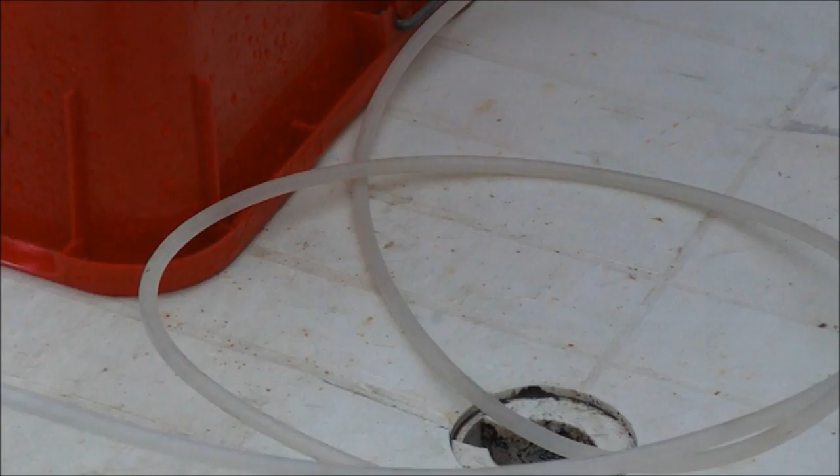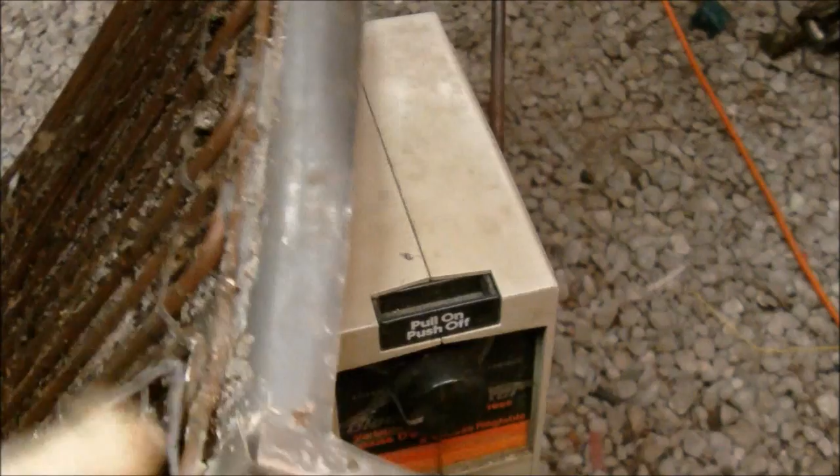Before I start putting the generator together, I just want to say a word of caution. Do not try this at home. This video is just for entertainment purposes only. So I'm using some scrap stainless steel. So the stainless steel was out of a little milk fridge, and I've just removed the stainless steel insert that was actually in there. You can see here it had some tubes on the back of it for the refrigerator part. And so what I've done is I've just cut this out of it.

It's a commercial stainless steel. So I think it's probably 316 or whatever, the good stuff. So what I do is I check the steel with a magnet, and stainless steel, the magnet should not stick to it whatsoever. So out of this piece of metal here, I can get 8 5-inch plates. And all I have to do is just measure these out now and cut them out.

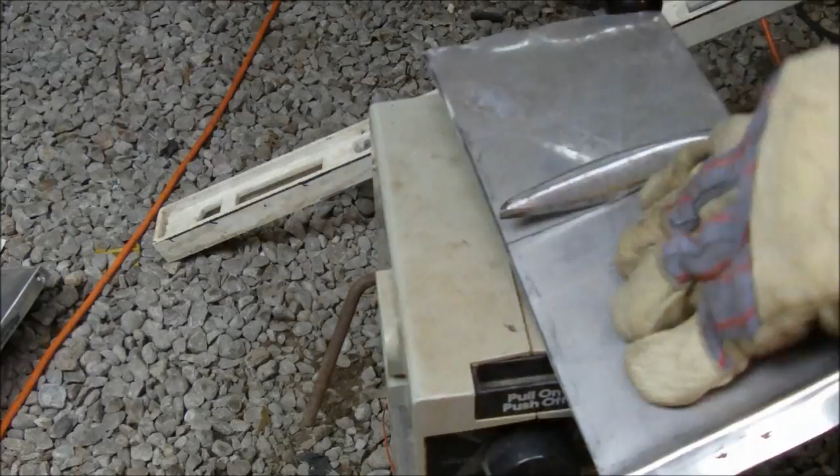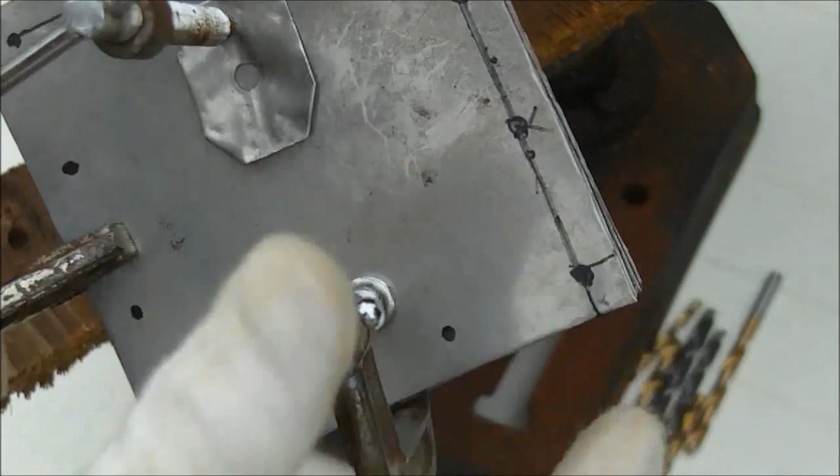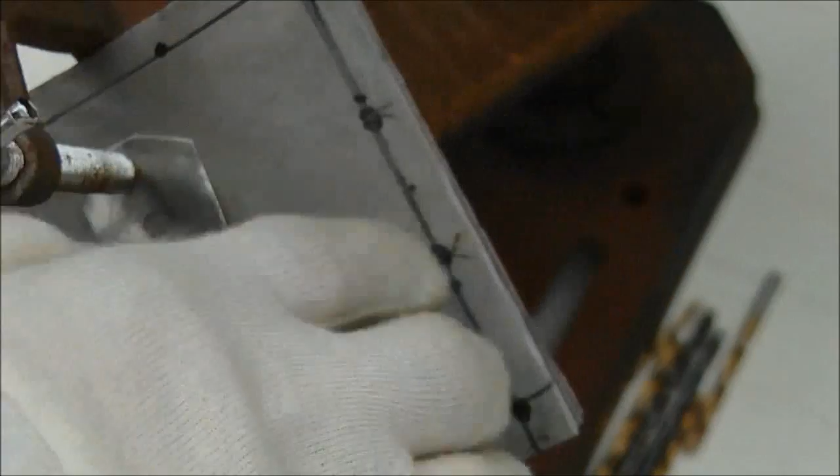So now I need to drill the holes in the plates. So what I've done is I've just sandwiched them together in these clamps here, and I've drawn out the holes, the spacing, and basically they're spaced out evenly on the plates where the gaskets are going to be. Now what I'm going to do is I'm going to start one hole, and then I'm going to drop a bolt in, and then I'm going to go around and continue. So that'll hold them together in place. So let's get started.

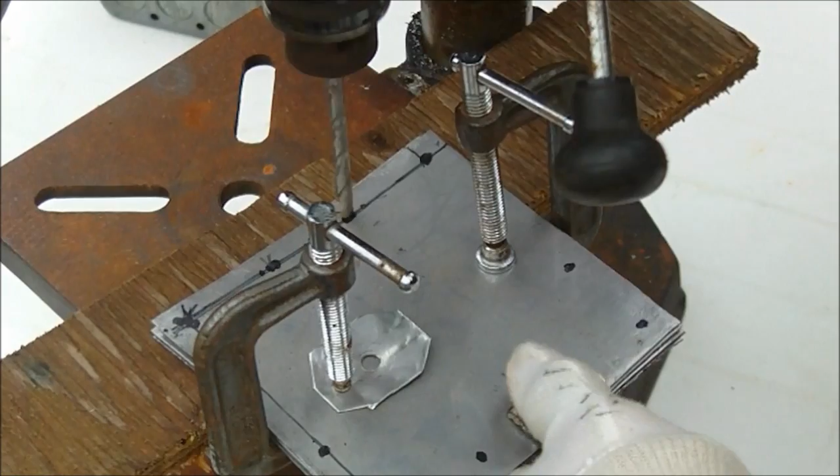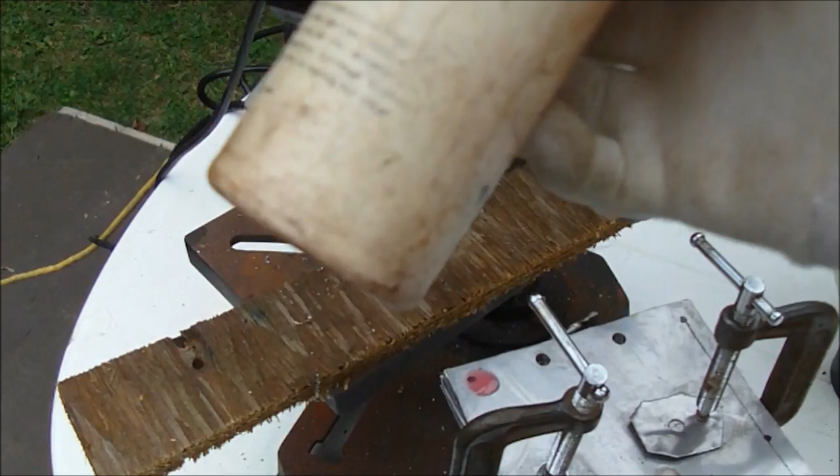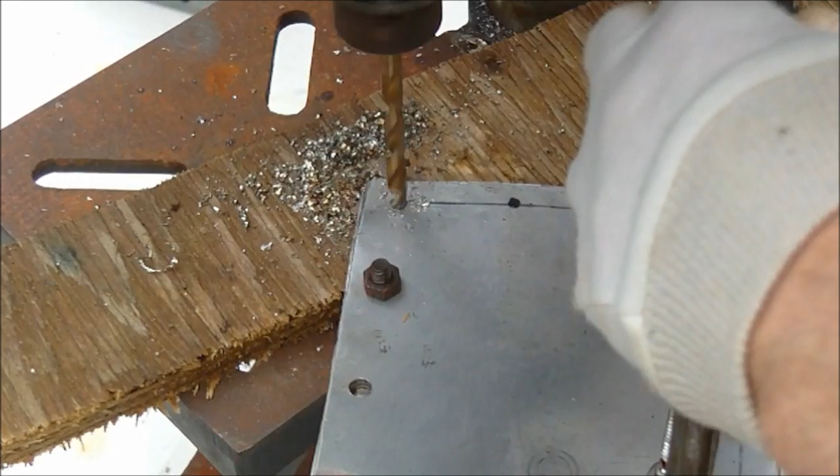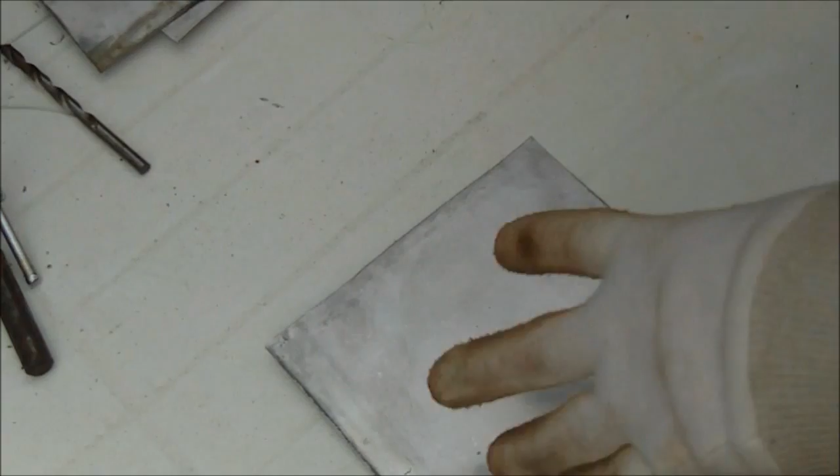So I'm going to put a little bit of oil. What I'm using is just transmission fluid and water mixed together as my drilling oil. And it seems to work okay. So this is just a backyard build, and I don't have the equipment. I have the neutral plates drilled. Now I need to drill the power plate. I have 3 power plates in this dry cell.

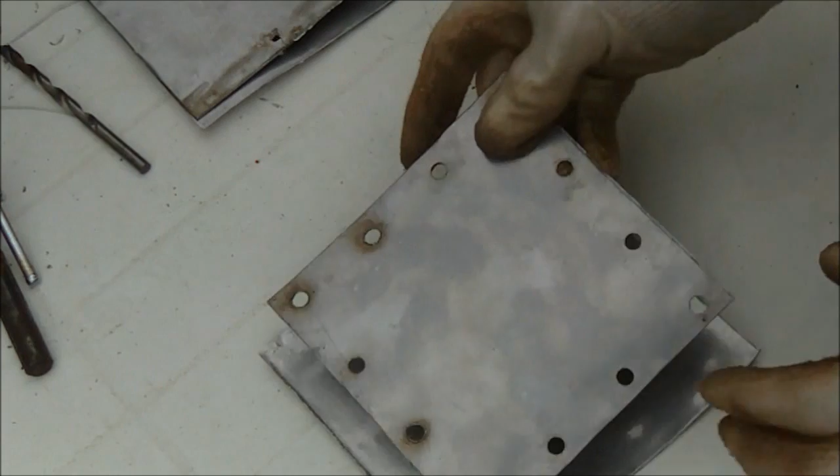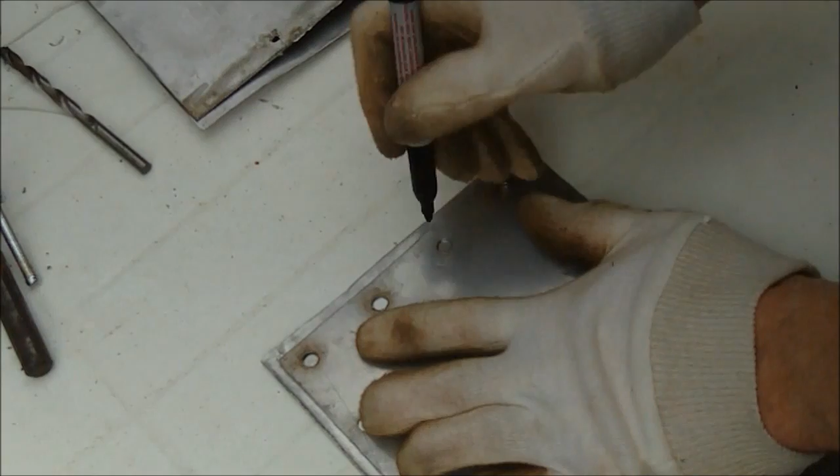And what I'm going to do is I'm just going to lay the neutral plate on top of the power plate. Now this plate here is larger, so then I can attach my terminals to it. And then I'll know which ones are the power plates as well. So now this plate is larger than the neutral plate, so you can just lay it on top. And whatever way you want to do this, you could clamp it down and then drill it, or you could just mark it with a marker. So I think I'm just going to mark the holes, and then I can just drill it out.

So drill the last power plate. Now you can see that it drills a lot easier when you're just drilling one plate at a time. So either way how you do this, you may want to just do it this way, one plate at a time, because you're going to go through a lot of drill bits. You're going to have to sharpen.

Okay, so if you drill your plates one at a time and you have this happen where the metal is actually pushed down and all jagged, then you're going to have to smooth that out before you go to put this thing together. So what you can do is you can hammer it down and then drill it out, but it won't be quite as smooth.

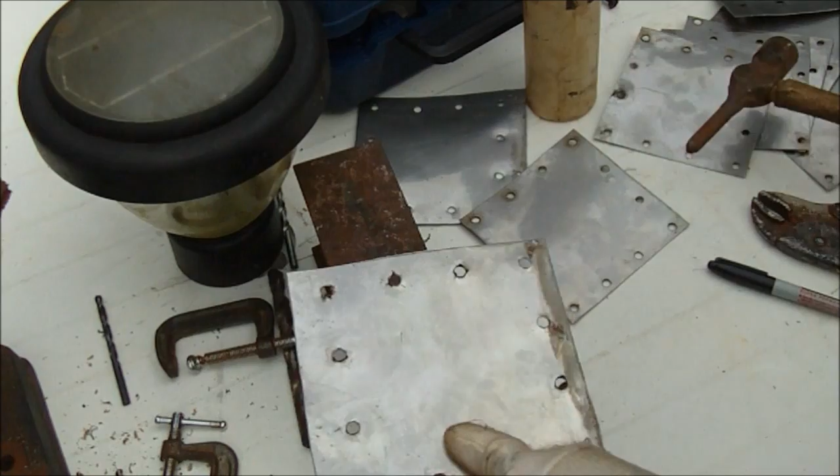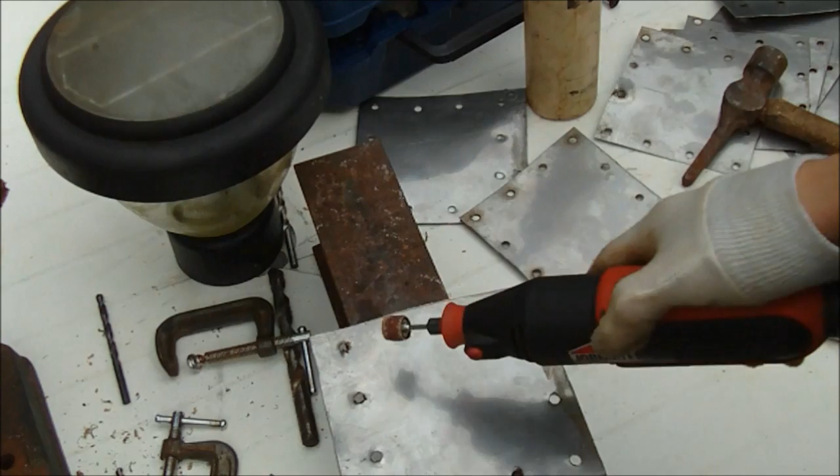So you should take a small grinding disc and just go over the area and clean it up. That's what I'm going to do. So I'll just use the Dremel and just clean up these burrs here. Once you've taken the worst off, then you can flatten it down with a hammer. So just put it onto a piece of steel, an anvil, and just flatten it down.

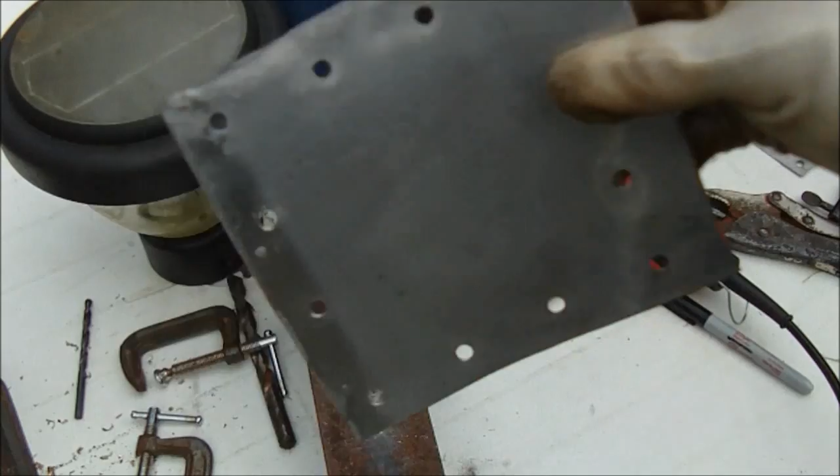So now it's smooth, and you can run your hand over it, and it's not grabbing any material, the gloves. So what you can do now is run it back through the drill again, and that'll just open up the hole and make sure that you have the 1/4 inch hole that you need, or whatever size bolt you're using to clamp these things together.

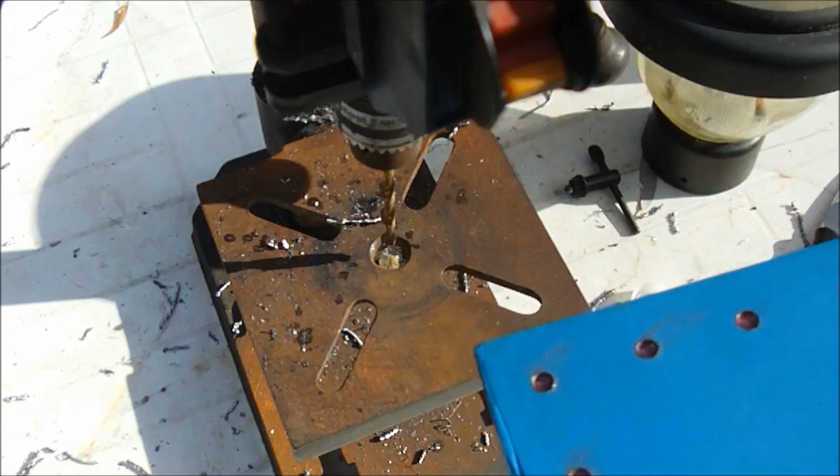So once you've drilled all the holes out again and they're at the proper size, then you could run the Dremel over top with a sanding wheel on it and take off any burrs. Like there's some there you can see. So you want to have this as smooth as possible. So I'm going to drill the end caps now. I've already drilled some holes in it.

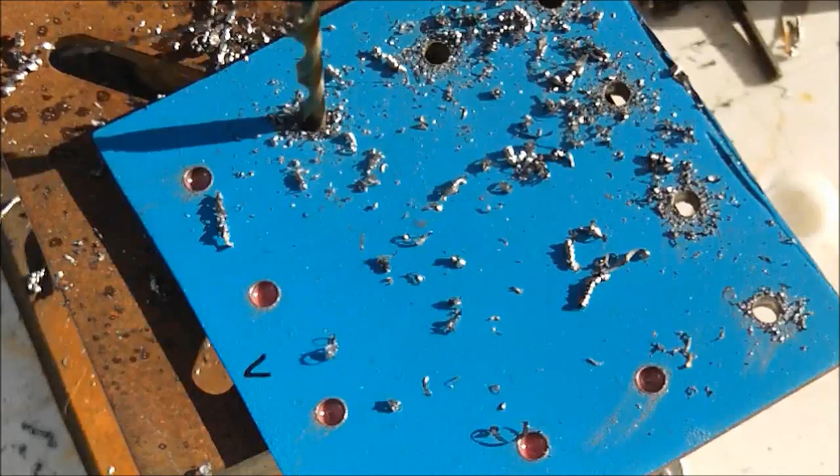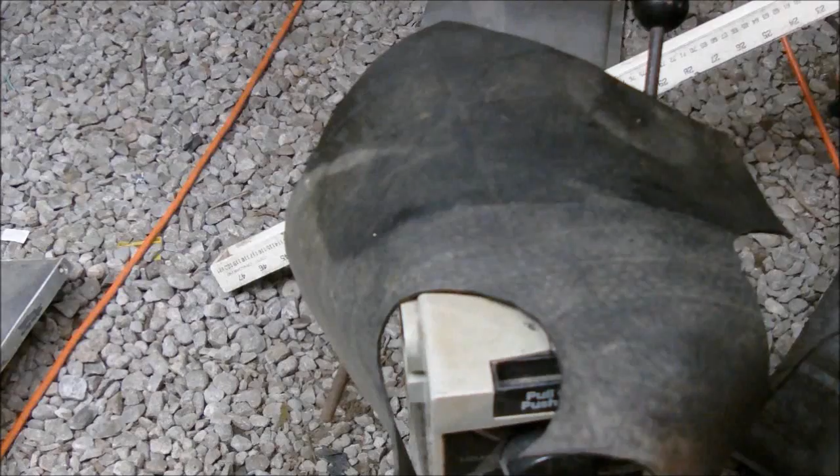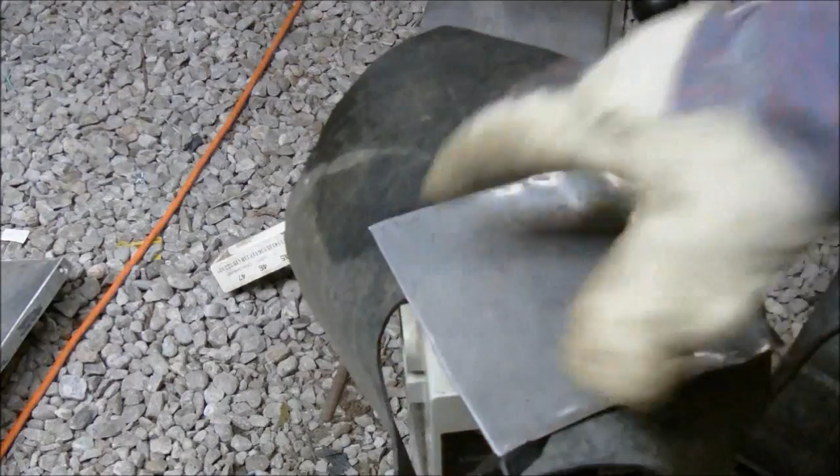So for my gasket material that will go around the outer edge here of the plate, to isolate these plates from each other and to seal them together to make them watertight, I'm going to use this inner tube rubber. And so I have an inner tube here. This is out of an old tractor tire. So I'm going to make the gaskets now.

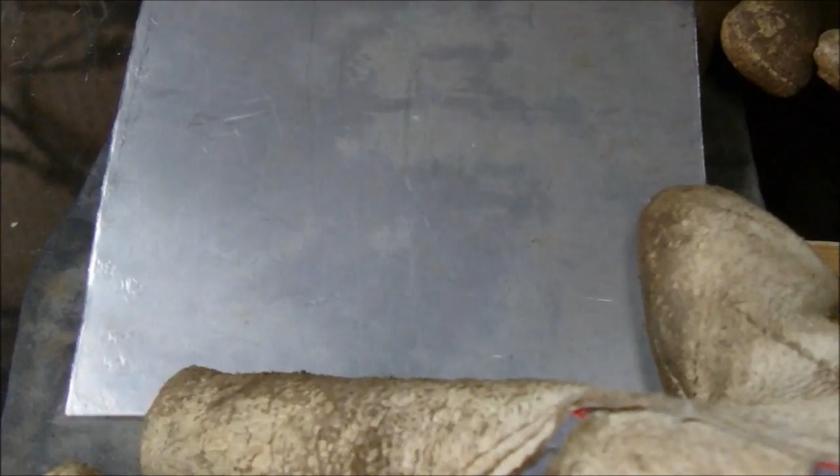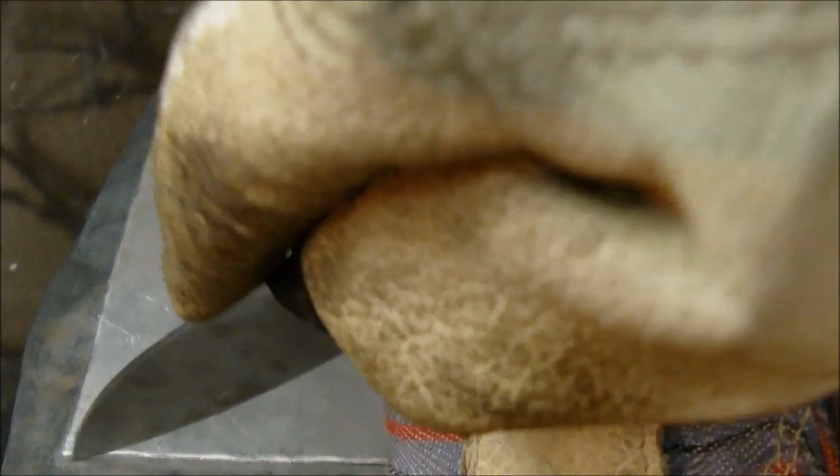I have the rubber here, and I'm just going to lay the plate onto the rubber. So what I'm going to do is just take the knife and use it to actually mark out the gasket. And I'm just going to push down. And this will give me an outline, basically, like that. So once you've got an outline, then you can just cut it out. So I'm just going to cut them out.

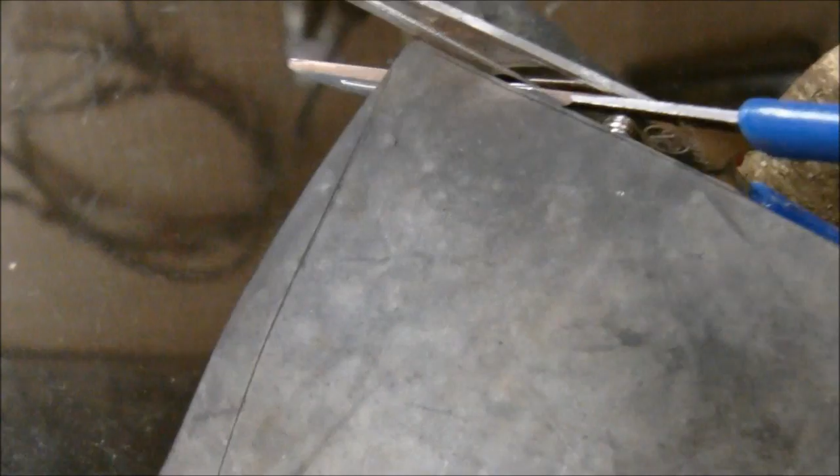Now, if you don't want to do them by hand, you could make a die, and then you could put the die underneath a hydraulic jack, and you could just press out the gaskets, so you'd be able to make as many gaskets as you want, and a lot faster.

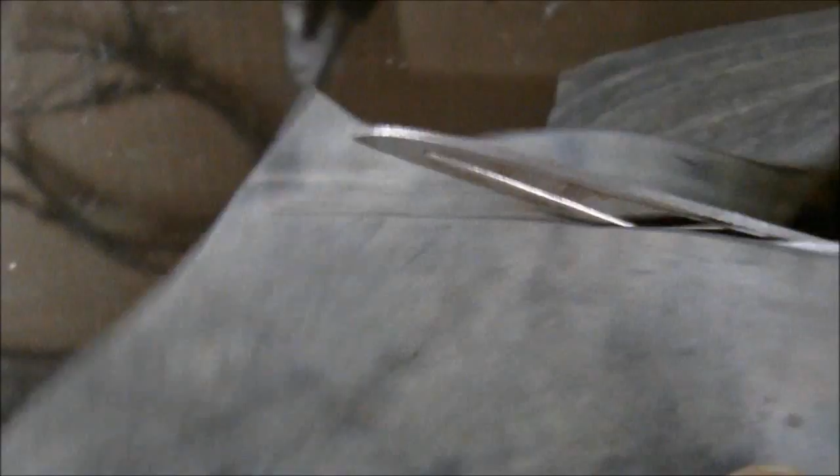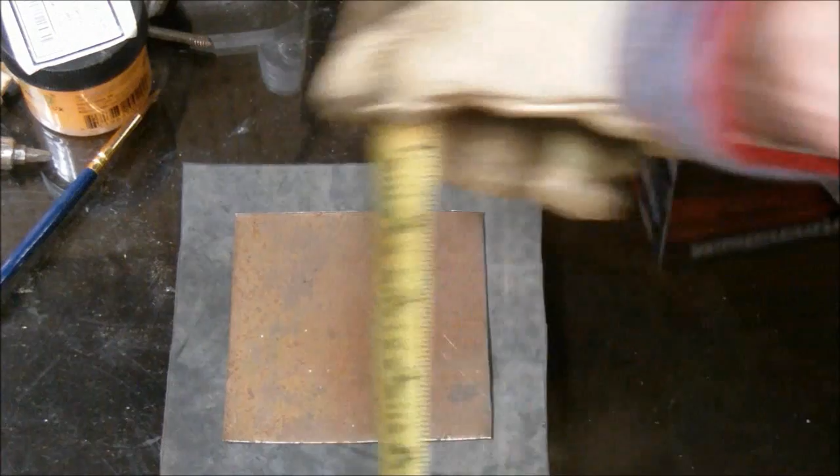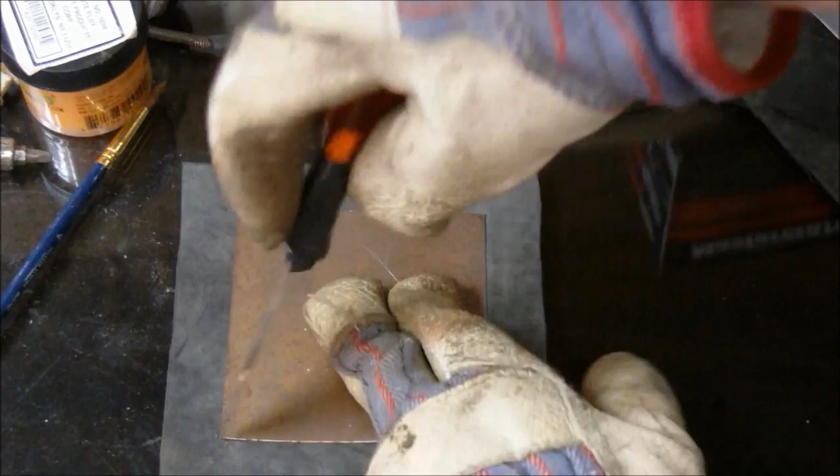What I've done now is I cut out a piece of sheet metal that is 3/4 of an inch smaller than this gasket here. So I could just lay that on in the middle here, and basically you can just measure around if you want and sort of line it up till it's in the center, and then all you have to do is just take your knife and hold this down and go around with your knife, and then that'll give you the exact distance all the way around.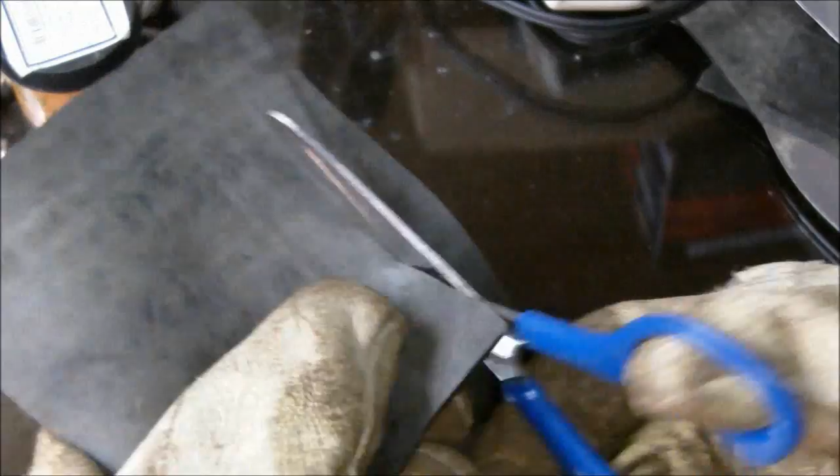You could also use a sharp enough knife to cut right through the rubber, and you could just cut it in one shot. So I got my impression there, my outline. What you want to do is poke a hole, basically, so that you can start your cut. And then once you get your hole started, you can just go around. It's really easy. And just cut it out. Okay.

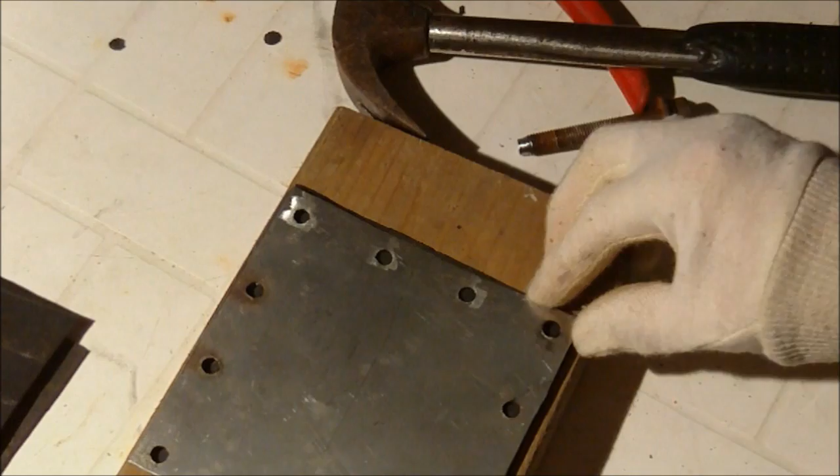So now I need to put the holes in the gaskets. So I have my gaskets here, and what I'm going to do is take one of the neutral plates, and I'm just going to lay the neutral plate on top of the gasket. Drop down a gasket like that. Place the plate on top and square it up as best as possible. Doesn't have to be perfect because the gasket material is a little larger than necessary.

And then I'll just take the marker and mark the holes. Now, a colored marker would be a lot better than this, so it would show up on the black, but it does show up, so it'll be alright. Just go around, and try not to move the plate in any way, or the holes will be marked wrong.

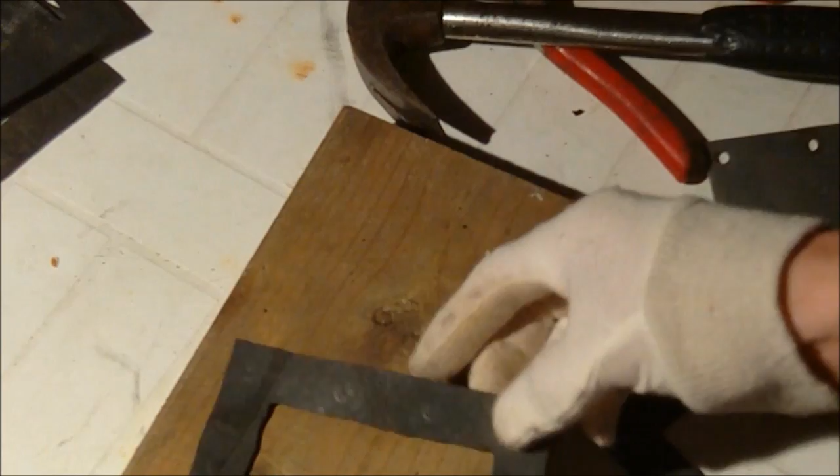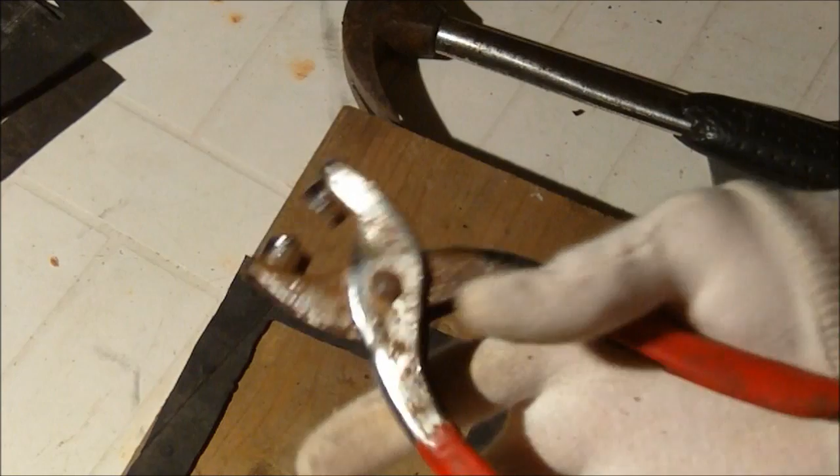And you can see now the markings on there. So now when making the holes, drill bits don't really work well for drilling out rubber or gasket material like this. So I'm just going to use a punch. I've made a little homemade punch here, and I could also use this eyelet gun. The eyelet doesn't work very well, but this one here works fine.

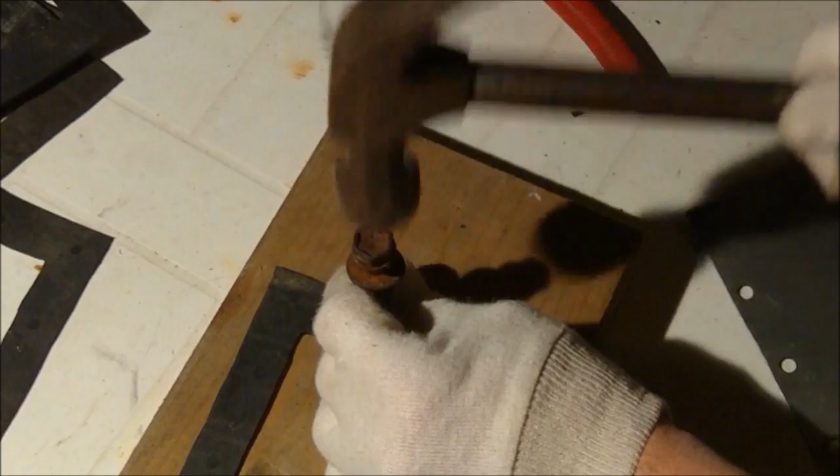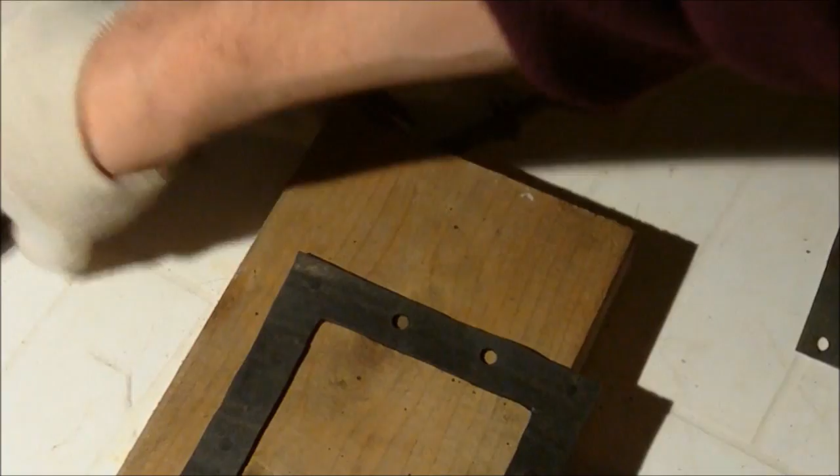It's just a bolt where I've drilled the center, and then I've just sharpened the edge around, and just put it over the mark, like that, and then hit it with a hammer. May have to turn it and then hit it again. But it seems to work. And now we have a hole, and it should line up with the plate, and away you go. So I just got to continue punching out these, and I have a whole pile more to do, so that's going to be a slow process.

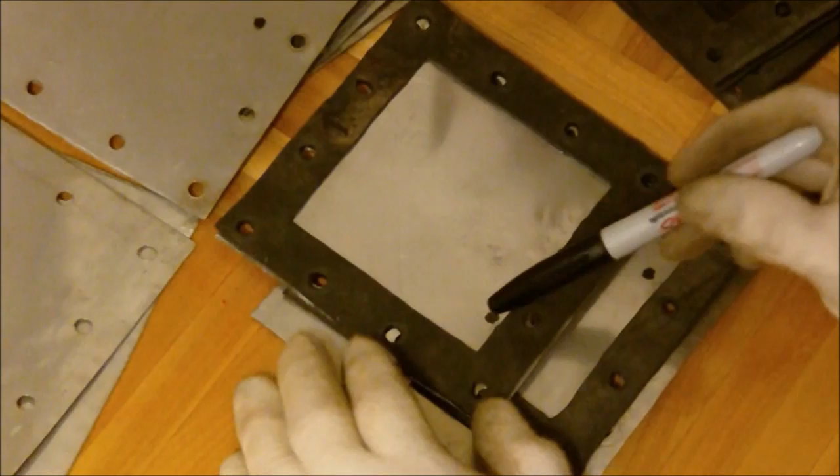So now we need to put some holes in the plates to allow the liquid to get in and the gas to get out. So what I'm going to do is I'm going to put a hole over here in this corner on this number 1 plate here, a power plate. So now on the neutral plate here, I'm going to put the next hole right here so that they don't line up. And I was reading about this, and it's better to actually stagger the holes, because then you don't have the holes all in line, because then there could be voltage seepage.

So the next one now on plate 2 will then be over here. So you can see what I'm doing. It starts here, and here, and here, and then the next one will be over there. So none of these holes are going to line up. And now on the vent holes for the gas, I'm going to put a hole up at the top, but I'm not going to stagger them too much, because you want the gas to get out as quickly as possible.

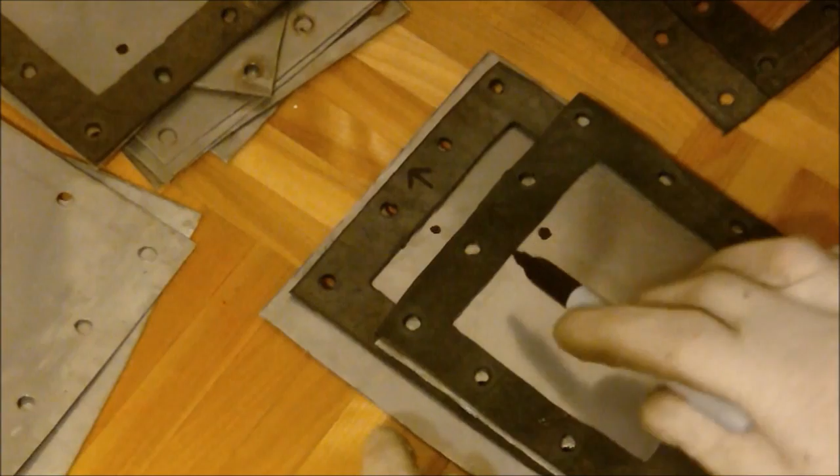So what I'll do is I'll put one hole over here, not quite as far over to the corner. So now on the next plate in line, the neutral plate, I'm going to put the hole over here. So they're not going to be too much out of line with each other, because you don't want too much restriction with the output gas.

On the end cap, I just laid a gasket, and I'm going to put a hole basically right in the center there. On the next end cap, I'm going to have a hole at the top. So this will be the inlet end cap, and then the next one will be the gas output. So the generator will be sitting up like that. Liquid will be coming in through here. It's going to fill up through all the plates, and then the gas on the last end plate will be coming out at the top.

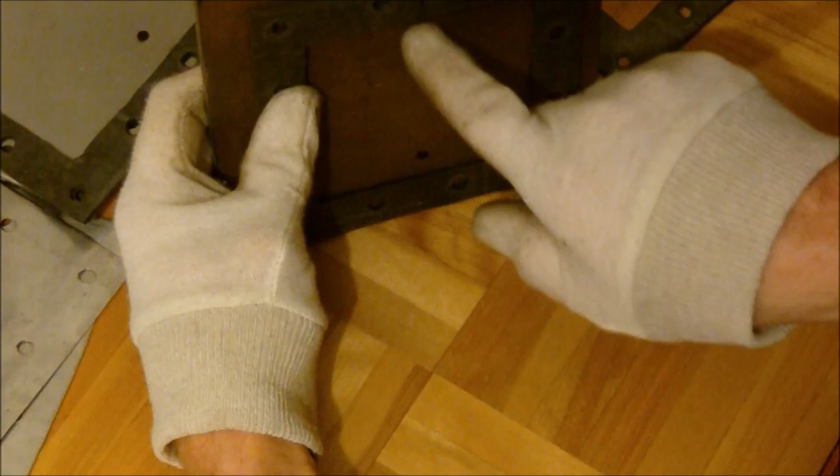So I'll show you the alignment of the plates here. I have the power plate negative here, 4 neutral plates, a positive power plate, 4 neutral plates, and then a negative power plate. So these neutral plates here don't actually have any connection whatsoever. They're just in between with a gasket. The only plates that we apply voltage to are the power plates.

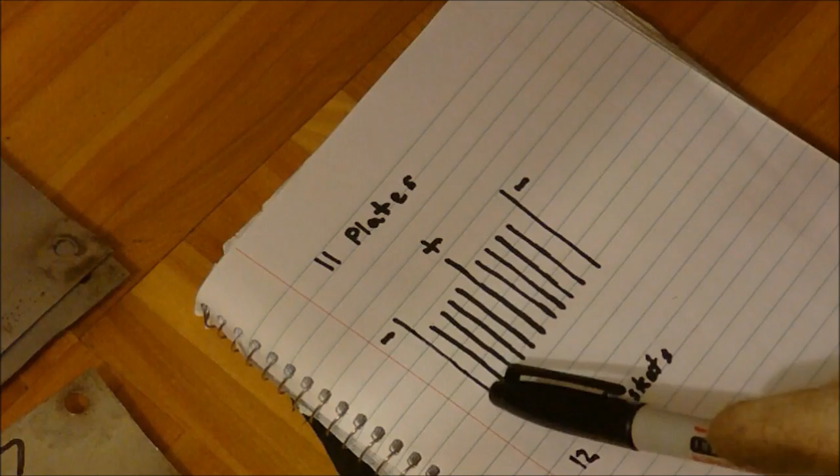So why we want to use these neutral plates here is because our source voltage is most likely going to be around 12 volts if you're going to be using this in a car or whatever. So what you need to do is you need to reduce the overall voltage between the plates. We don't want to have 12 volts across these two plates, because if we do, it's going to wear out this metal plate very, very quickly. There's going to be too high of a voltage. And that's why we use these neutral plates.

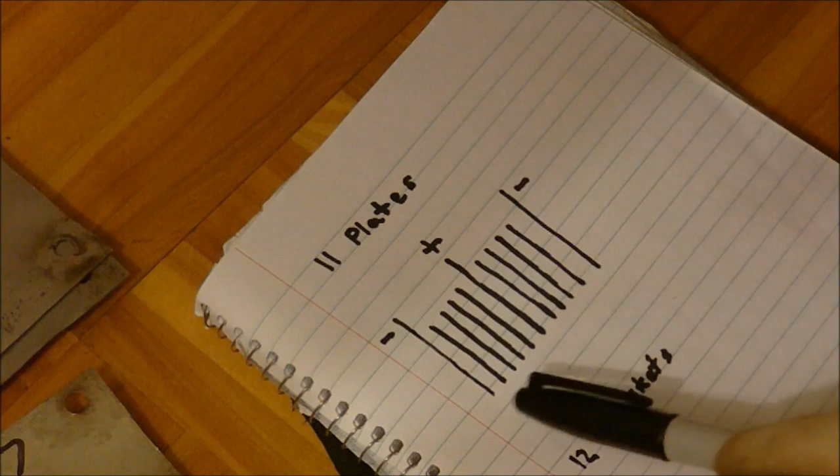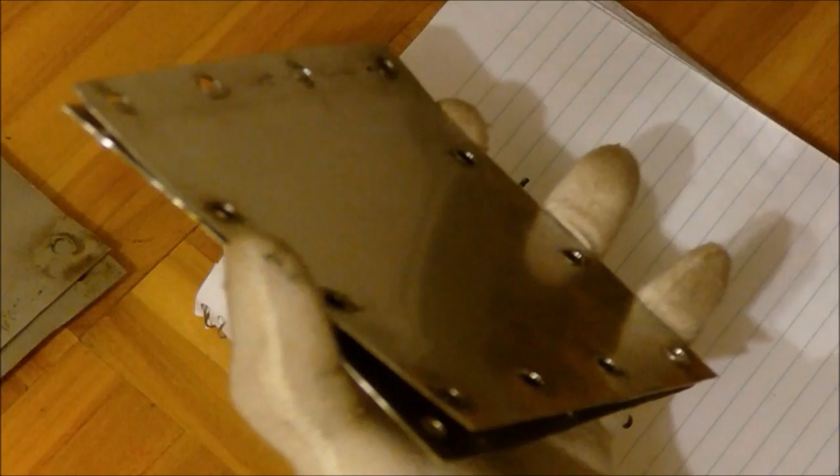And because with electrolysis, you don't want any more than 2 volts between each plate. Because what happens is if you put too high of a voltage, then the metal will start to break down and it'll just erode the plates. There'll be too much current and the plates will just wear out very, very quickly. We don't want that. We want to try to conserve the metal, the stainless steel, as long as possible.

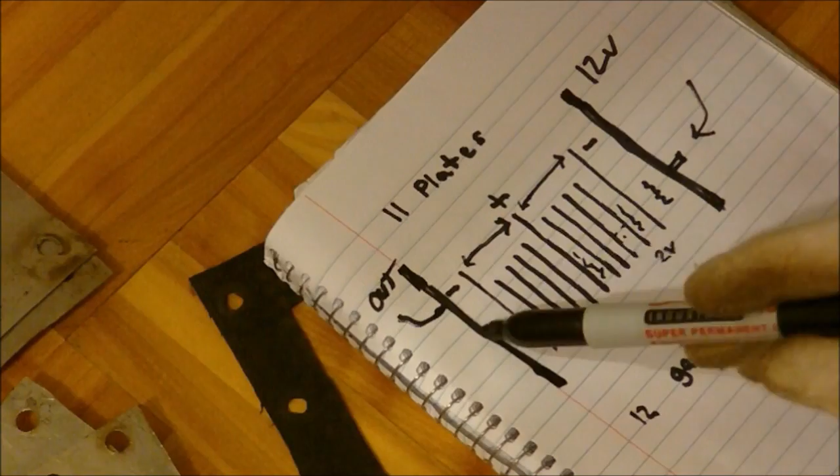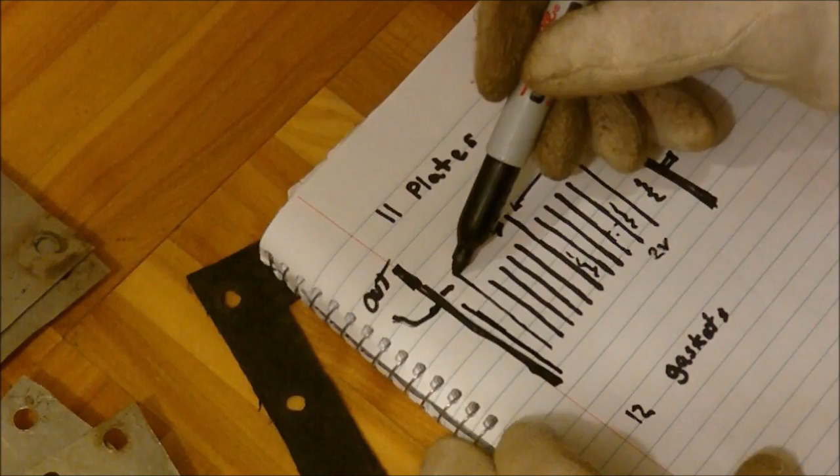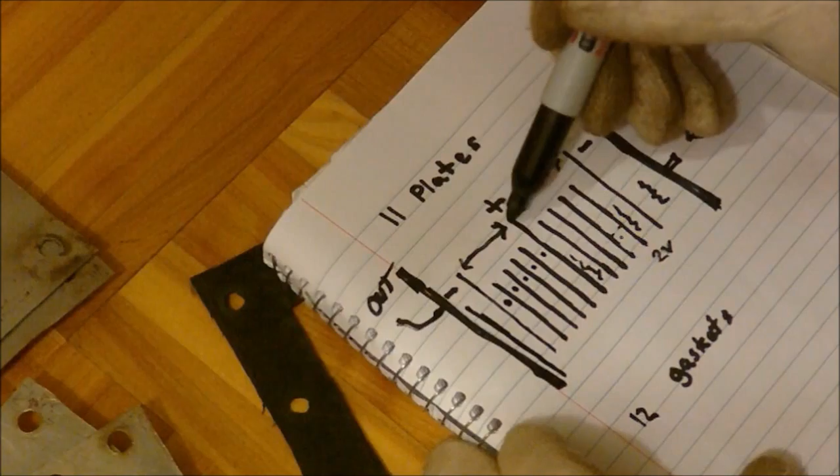So now to put this thing together, we have the two end caps. We're going to place a gasket in between here. So a gasket's going to go in here. And then we'll put the first power plate, which will be negative, and then we're going to put another gasket in here, and then a neutral plate, and then a gasket, then a neutral plate, gasket, neutral plate, gasket, neutral plate, and then a power plate, the positive plate. And then we're going to put another gasket, and so on and so forth until we get to the end here.

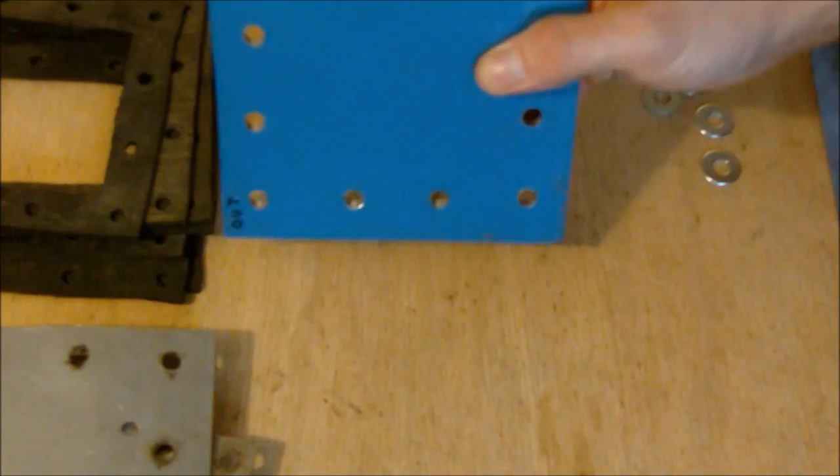So I'm going to start putting the generator together now. I have an end cap, and I have my bolts. Now these bolts here, I actually ground them down a little bit so that the diameter's a little smaller so that they don't short out against the plates.

So you don't want these bolts contacting any of the holes in the plates, because then it'll short out between the plates. So either you can coat these bolts with something like polyurethane or paint, or you could wrap some tape around them, or you could put a little spacer. The kits you buy actually come with a collar that goes over top of the bolts.

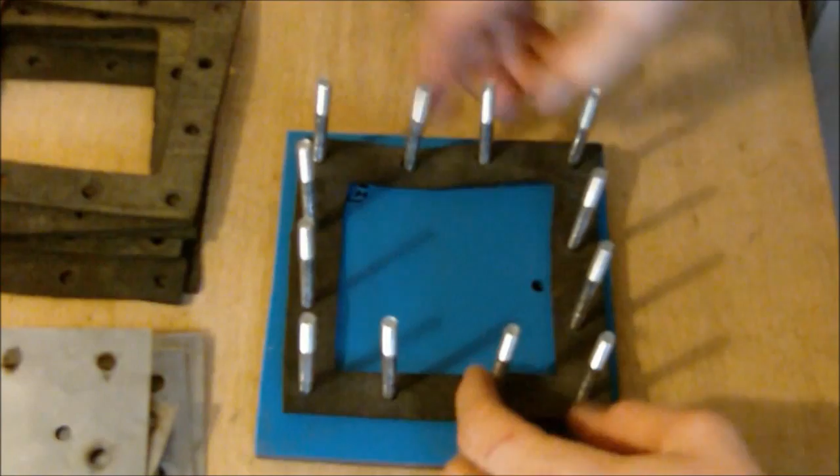Okay, so I'm just going to flip this now with all the bolts in there. I'm going to take a gasket and lay it over top of the end cap and the bolts. I have everything marked. I have arrows on the end cap and on the gaskets and also on the plates, so everything's going to line up, and this is number 1 power plate. This one can be a negative plate or a positive, doesn't really matter. I'm going to use this one as a negative plate.

So I'm going to drop the plate on now. We've got the gasket on. Okay, so now once this is tightened up, hopefully these bolts here won't contact the plates. So we put another gasket on over top of the power plate, and then I'm going to lay on the first neutral plate. It's marked number 1, so I'm going to drop that neutral plate on top.

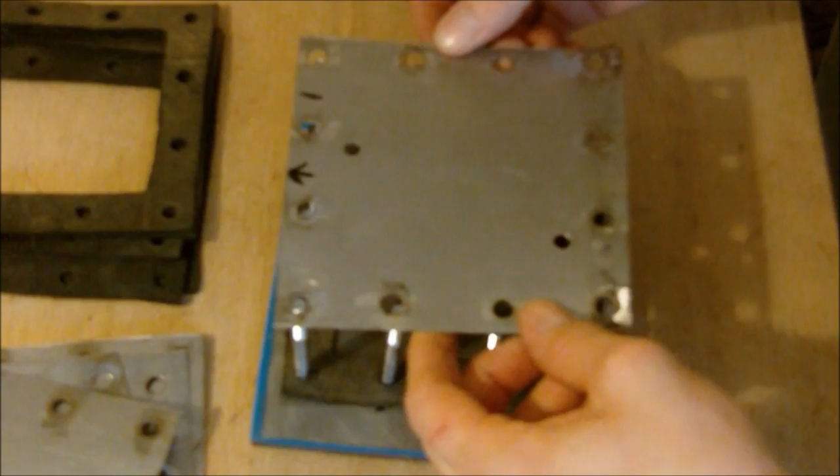So I'm going to drop on another gasket now. Now I'll put on the second neutral plate. And we'll lay another gasket on. So the neutral plates don't have any electrical connection between them, and we're only going to contact the power plates.

Third neutral plate, you can see the holes, the inlet hole and the gas out hole, and you can see that on this plate here, the inlet's over here and the gas is over here. So they're not lined up, and I think it's better to do that. Drop another gasket on here. Number 4, neutral plate. Another gasket.

So now we're going to put the center power plate in. I'm using this one as a positive plate, and the outer 2 will be the negative. Now you can wire it the opposite if you want. This can be negative and the 2 outer positive. Drop this one in place.

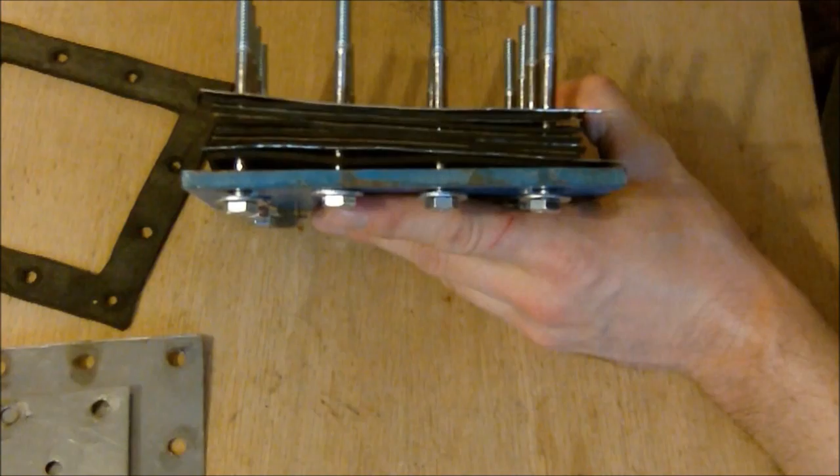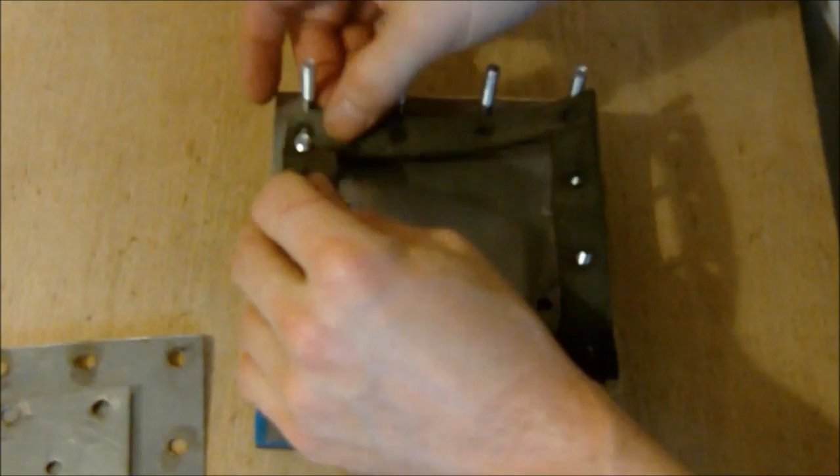Okay. So now if you look at it here, you can see there's a gasket, the first power plate, 4 neutral plates in between, and then the next power plate. So it's pretty simple how this goes together. I'll drop another gasket on. This one's just a homemade backyard build, so it's not really the greatest, and the plates aren't perfectly smooth or anything like that.

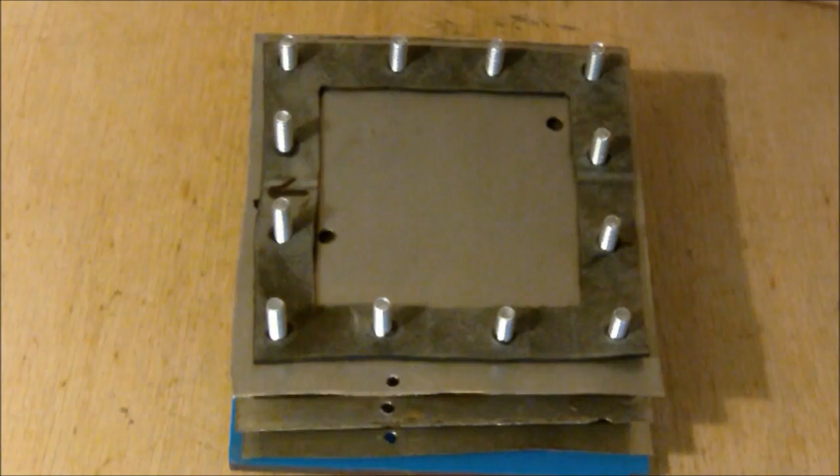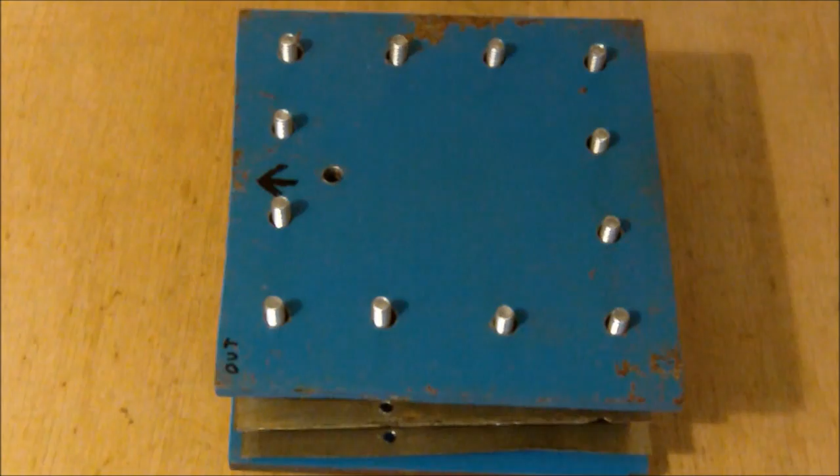So now we're going to put another neutral plate on. This is number 5. And we'll put the next neutral plate on. So now we have all the plates on, so you can just take the end cap and drop the end cap on, like that. And I'm going to put the washers on. I'm going to put a few extra washers because the bolts are too long, so we'll put a couple on here.

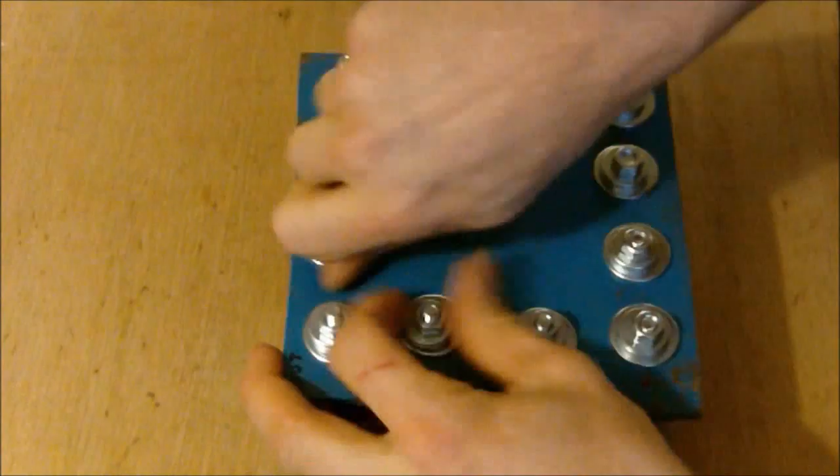Just going to tighten it down by hand right now. I had to put some extra washers on because these bolts were too long. No big deal. Now, you can put longer bolts on here, and then you can add more plates. That's a nice thing about these dry cells. So I'm going to torque it up. You don't really want to go around in a circle; you want to crisscross. So I have a sequence on here, and I'm going to torque it up and tighten this up.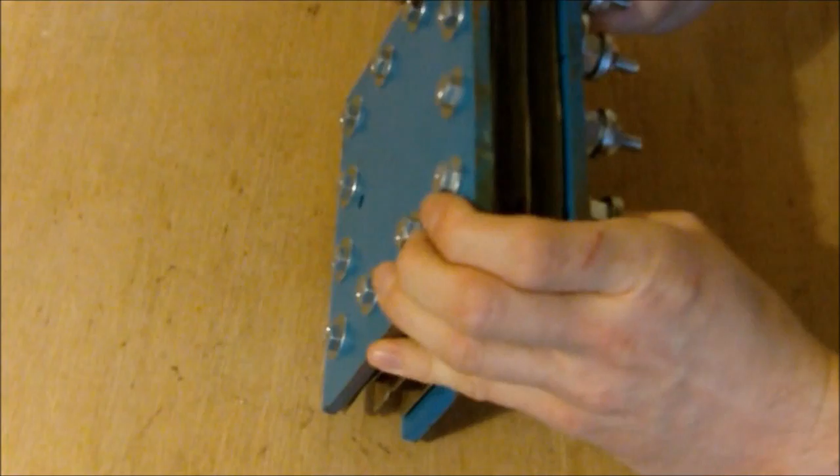That's tight enough. They've all been tightened, and now you can see that it's starting to look like a dry cell HHO generator. So now to connect this thing up, you need to hook to these 3 plates here. You can see I drilled a hole in each plate, here, here, and here. So I'm going to attach 3 wires to this. The only costs involved in this generator were the bolts and the washers and the nuts. They were about $4, so very little was put into this.

So I recommend to check out other people's channels. They have way better generators than I have here. This is just a very basic, roughly built generator. If you check out their videos, they're building some really nice stuff.

So that was my homemade HHO generator dry cell built from scrap materials, and thanks for watching.